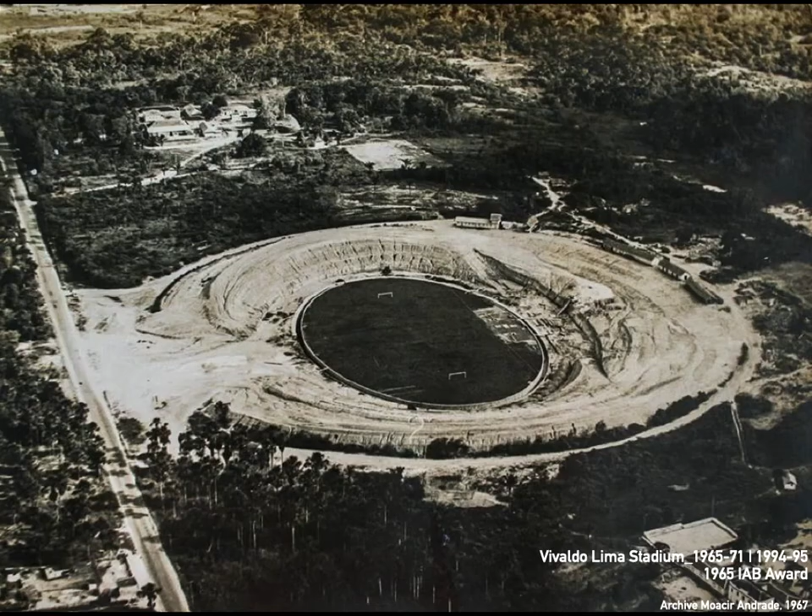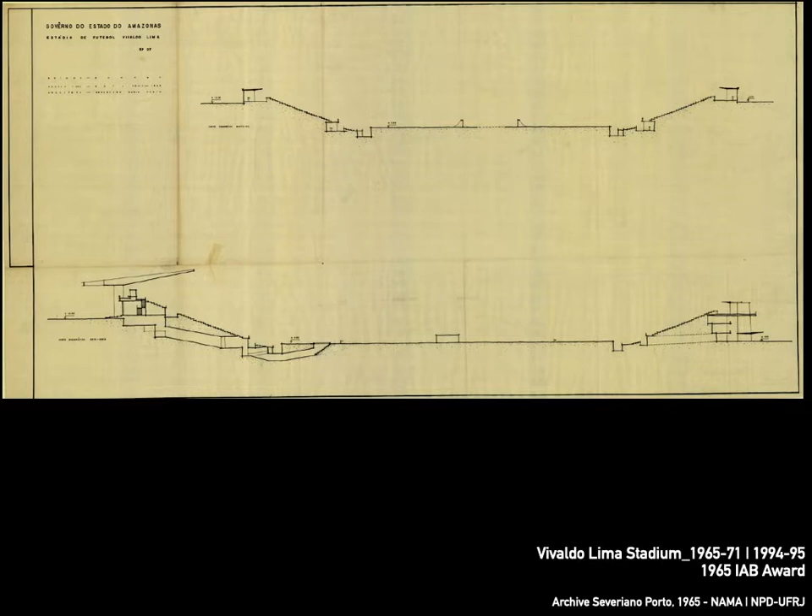The Vivaldo Lima Stadium was a milestone of developmentalism in Amazonia, as the main reinforced concrete construction to date in the region. It was embedded in the land and eliminated a large span of reinforced concrete bleachers with the simple support of these on the slopes.

Severiano Porto verifies the problems that occurred in the construction of Brazilian stadiums. By the end of the construction, the resources were scarce, which determined the cutoff of finishes, and facades were unfinished.

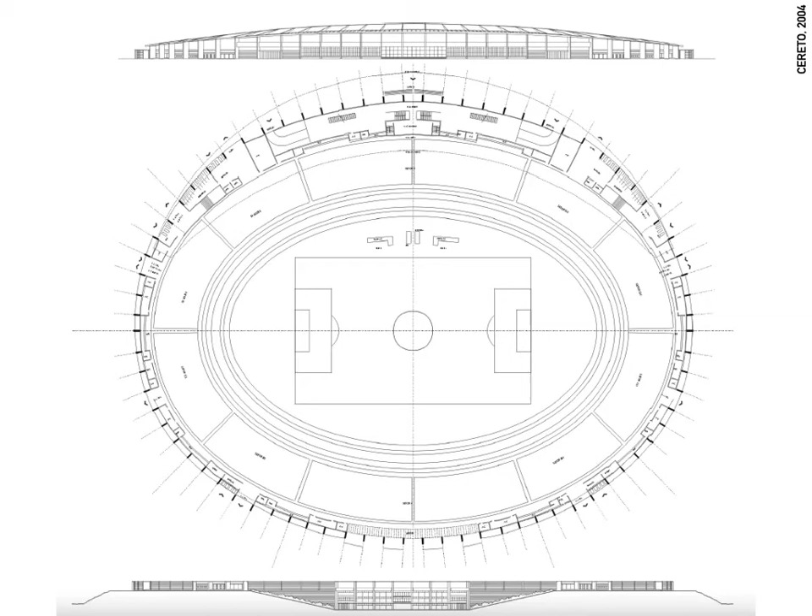The strategy of reducing the facades to suit the topography is rational and economic and supports the architect's design decisions. As a result, the building is low-rise and integrated into its immediate surroundings. The stadium had a capacity of 48,000 spectators.

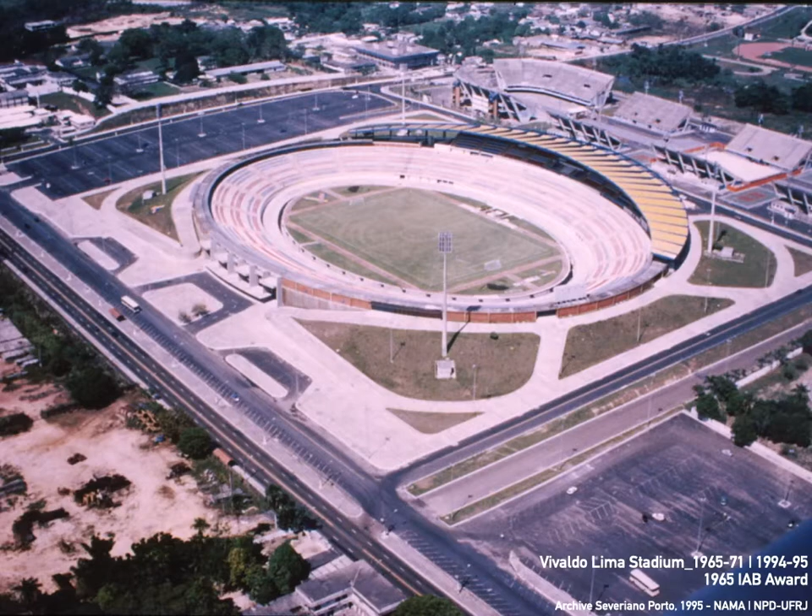Porto made Cafundó House for his family in Manaus on a rented site in the suburb. He distributed a wooden pavilion with a sawmill treatment on pilotis for social and intimate activities and the other areas in bricks for support activities. There was no glass in the frames, just movable cedar wood boards.

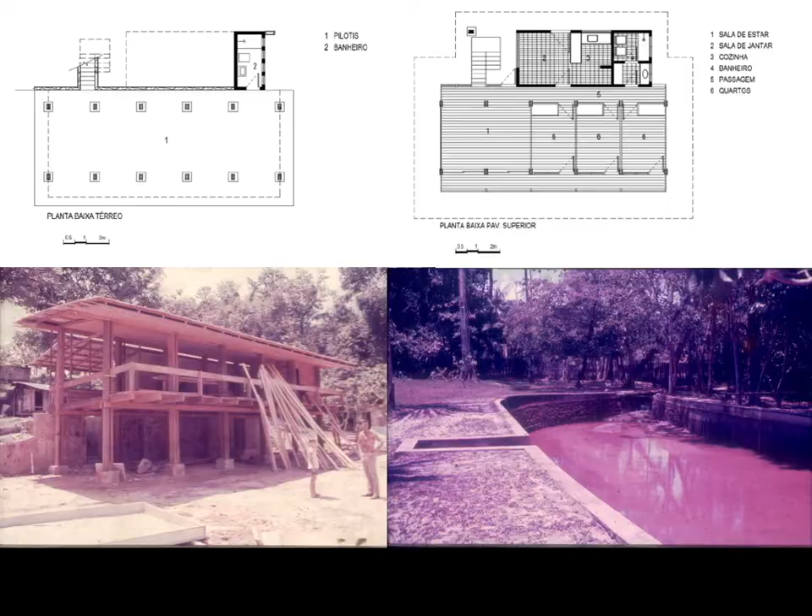Cafundó House was a manifesto against the government decision not to use this material for buildings in Manaus and reduced costs of construction 25% compared to brick buildings at the time.

Straw Hut Restaurant was a first building award, first prize in 1967. Porto's experience on the building site makes it possible to learn from the carpenters about new construction details, new ways of fitting wooden pieces, fixing straw on the structure, and treating wood as a material that should be incorporated into the site, as if it were still part of the rainforest.

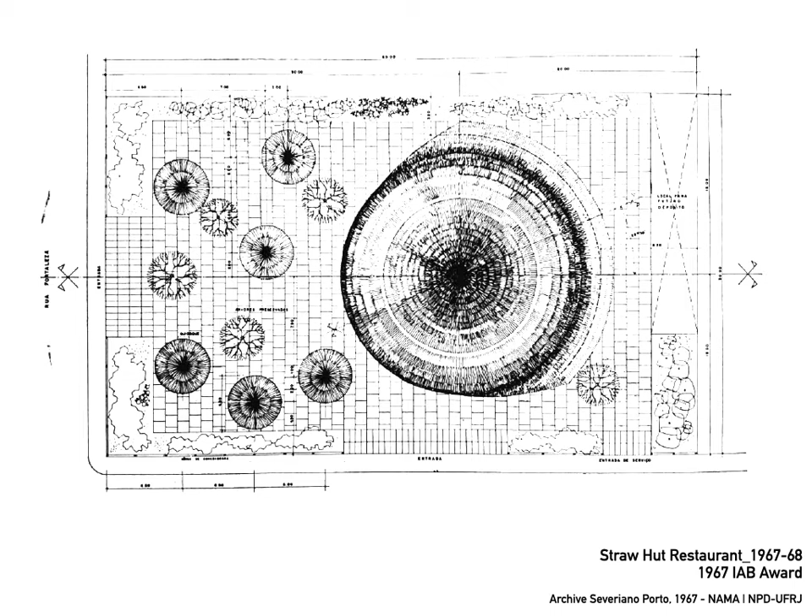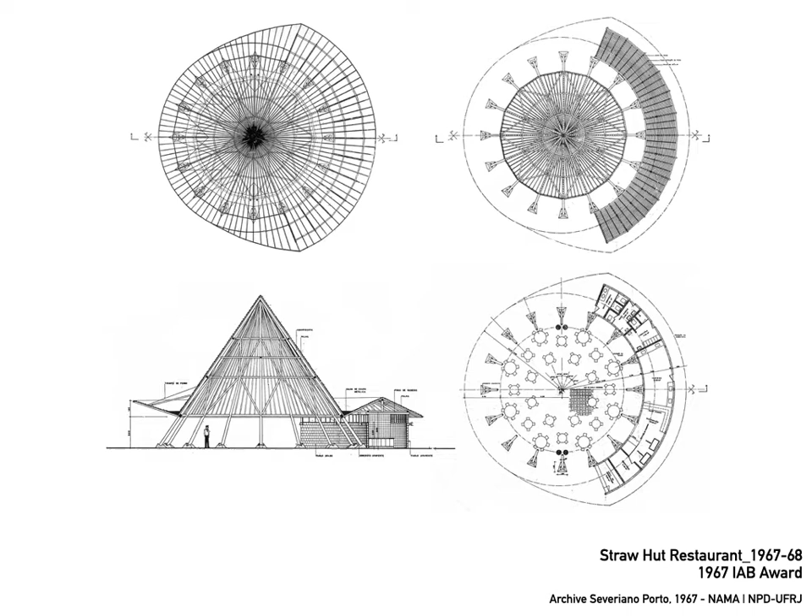The choice for a pure geometry and circular plan was made by the wide possibility to adapt it to the site. The carpenters present other simple and effective solutions for the construction that I've discussed with Porto. The wooden pillars formed a conical shape, covered with busu straw used by indigenous people in their malocas and chapanas. The space division was traditional with bricks. The low budget defined the choice of materials and construction techniques.

By that time, Acariquara wood was used as power energy poles in Manaus. The use of Acariquara wood without treatment and with simple fixation, as the carpenters were used to working in naval carpentry.

Porto's second house in Manaus was featured by simplicity in construction and wood treatment with complexity in architectural composition. The trees were cut for construction in a location close to the site without industrial treatment. In order to avoid shear between the pieces' joints, wider sections were used compared to commercial ones. Such dimensions matched the concrete structure.

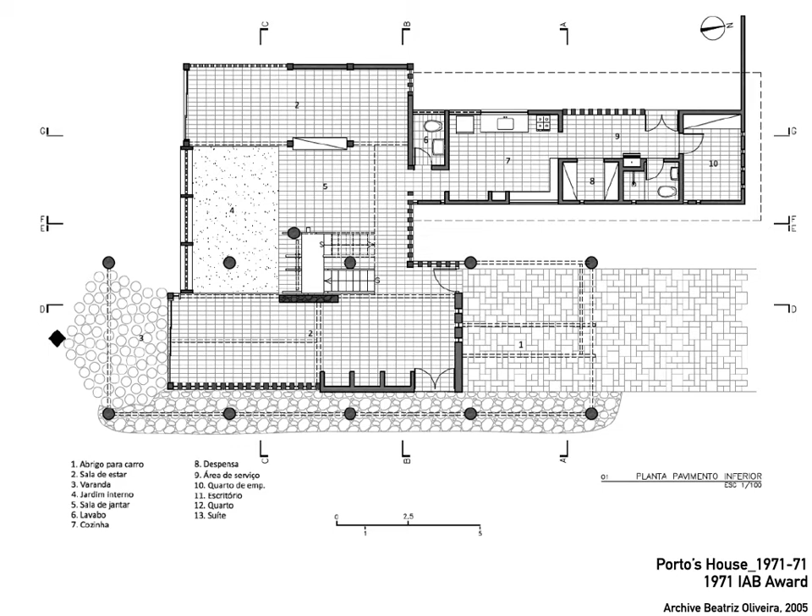The plan presents a simple geometry with a compositional complexity in the configuration of the building parts. The sectorization of the ground floor is conservative, with the separation of the service part in bricks and the social part in wood. On the second floor is the intimate part, with the studio and two small suites. All spaces are cross-ventilated and facing the Amazonian atrium, making a visual integration with the social area.

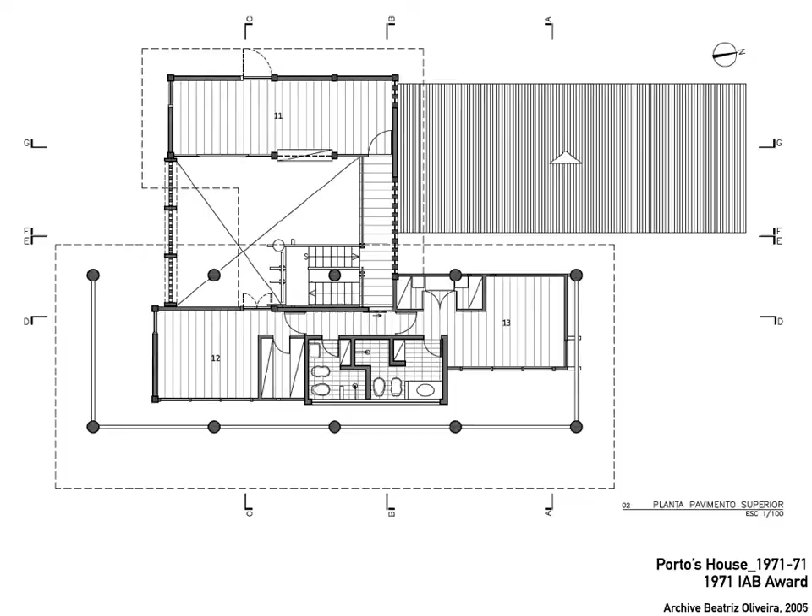The Amazonian atrium was the core of the house and presented contrast between open and closed, covered and open, light and dark, natural and artificial, handmade and industrial. The wall's porosity was diverse, which allowed constant cross-ventilation with different luminosities. Pillars made of Massaranduba wood with yellow glass gelosias and concrete cobogós framed the garden of the Amazonian atrium.

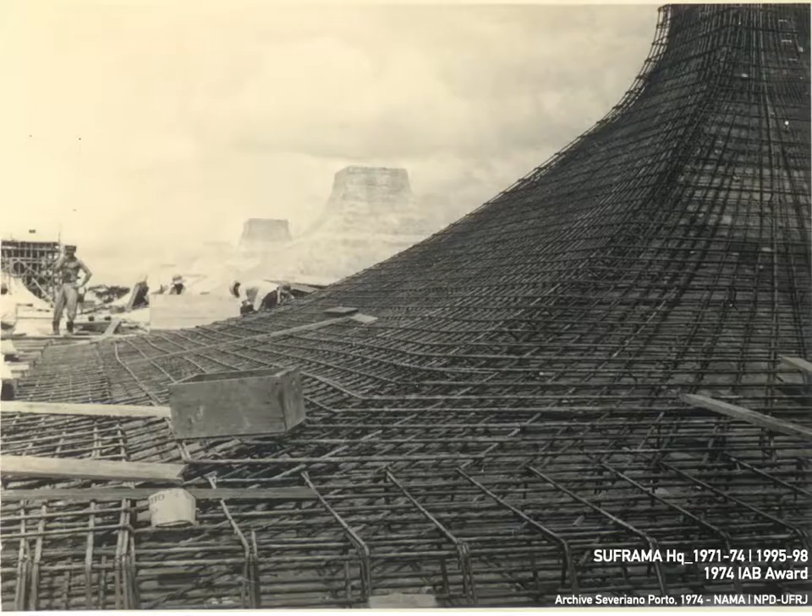SUFRAMA is an independent federal agency that represents Manaus Free Trade Zone. It is a symbolic milestone of the beginning of industrialization in Amazonia in 1967. The government hired Porto for a wooden building that would represent Amazonia. Porto stated that SUFRAMA would have difficulties to maintain a public building in this scale in wood, so he built it in reinforced concrete.

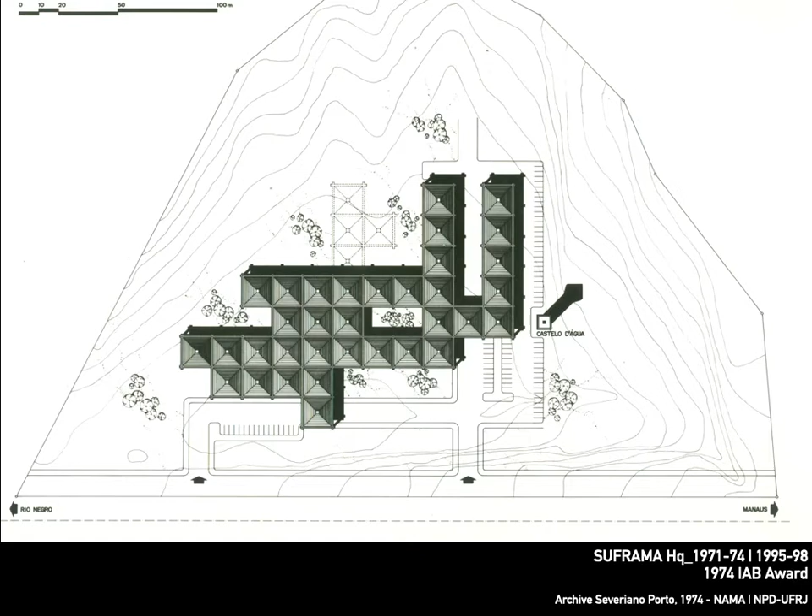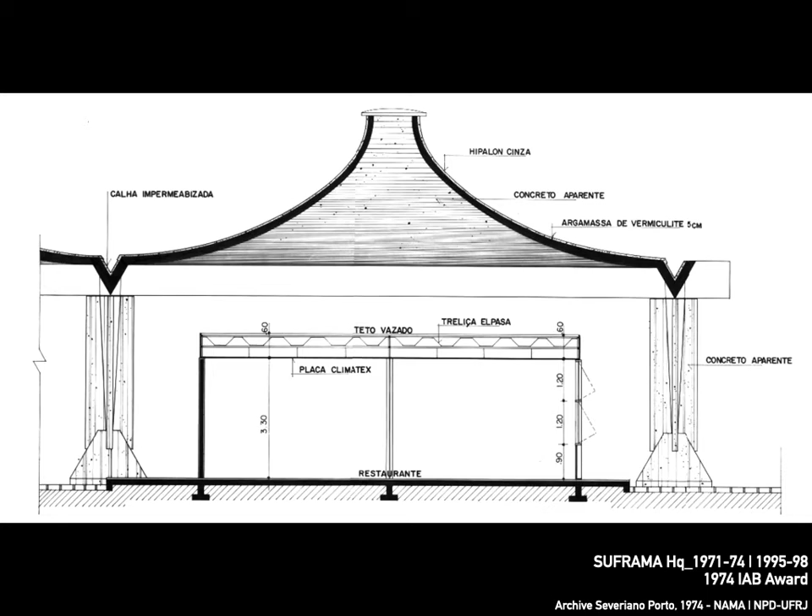The proposal is structuralist, similar to production industries. Porto proposed a homogeneity between the admin functions in his project without formal distinction in functional hierarchy. SUFRAMA's modules are 15 by 15 meters and are like tents with 4 pillars. The modules' cover has curved and arched slabs in reinforced concrete with a dome at the top. They are orthogonally juxtaposed, which allows a plan with depth without causing damage to lighting and ventilation.

Robert Schuster's Weekend House is located in Igarapé do Mariano in Manaus. He requested a house with a total environmental interaction.

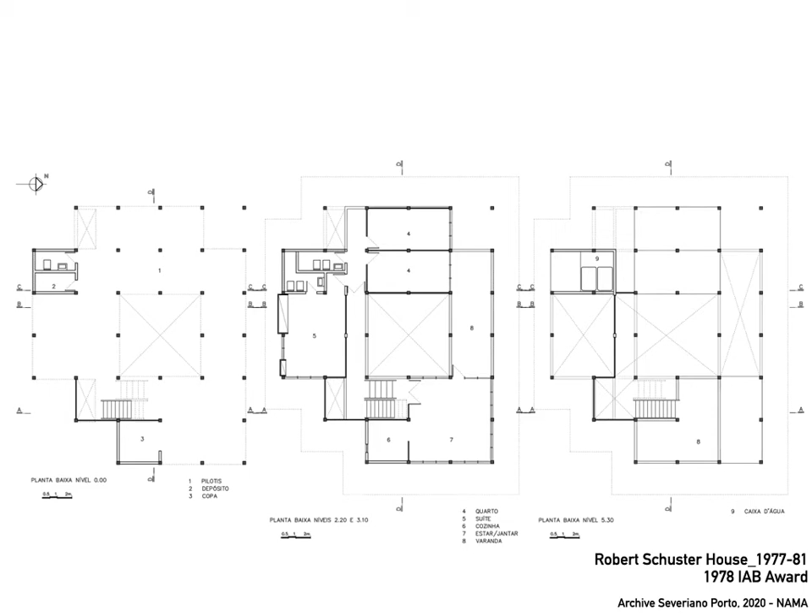Beneath the forest canopy, the pillars of this jungle house help it to merge with the tree trunks. Its regular geometry is determined by a rigid timber grid that is adapted to the topography and delicately touches the unpaved ground in the form of pilotis. The structural mesh is 2.5 meters by 2.5 meters.

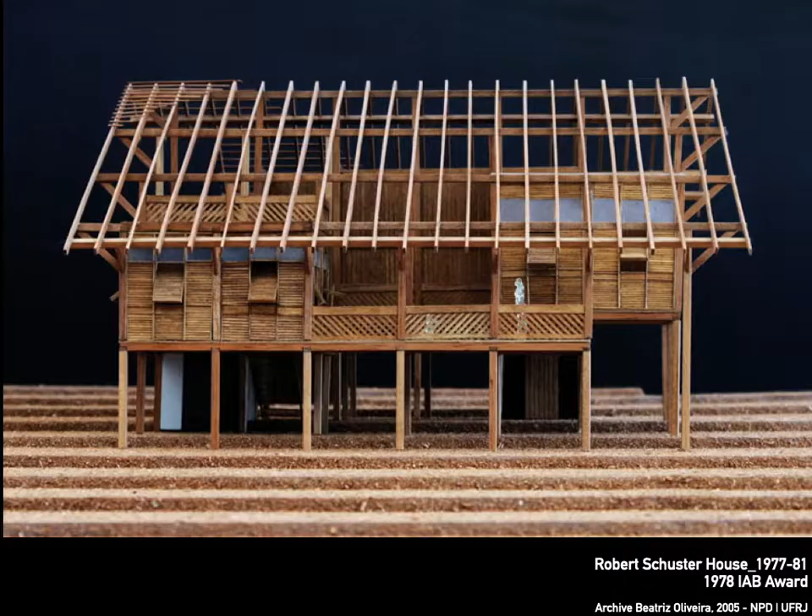Schuster's house is located on the highest part of the site. The land contains 30-meter high trees. The vegetation that protects the house from the sun is a threat due to possible falling branches. Porto safeguards the permeability of the soil, the leafy ground, and verticalizes the setting, in contrast with the traditional typology of riverside Amazonian houses. This condition requires a robust house structure.

The wood comes from a range of species and it is treated by the carpenters working on site. Nothing comes from the sawmill and edges are smoothed with a chainsaw. The roof of cavaco, wood chip tiles, protects the building from weather. This innovative solution was unusual in the context of Brazilian architecture in the 70s, but is common amongst the riverside dwellers of Amazonia.

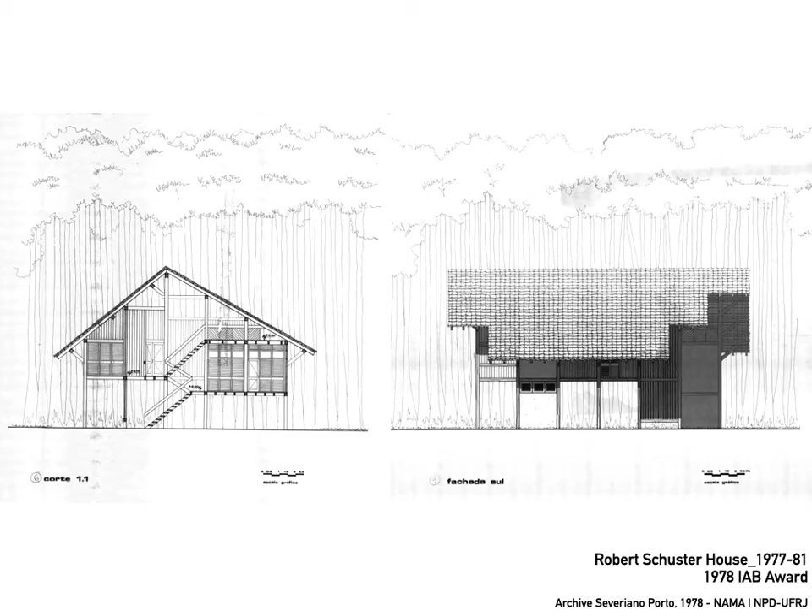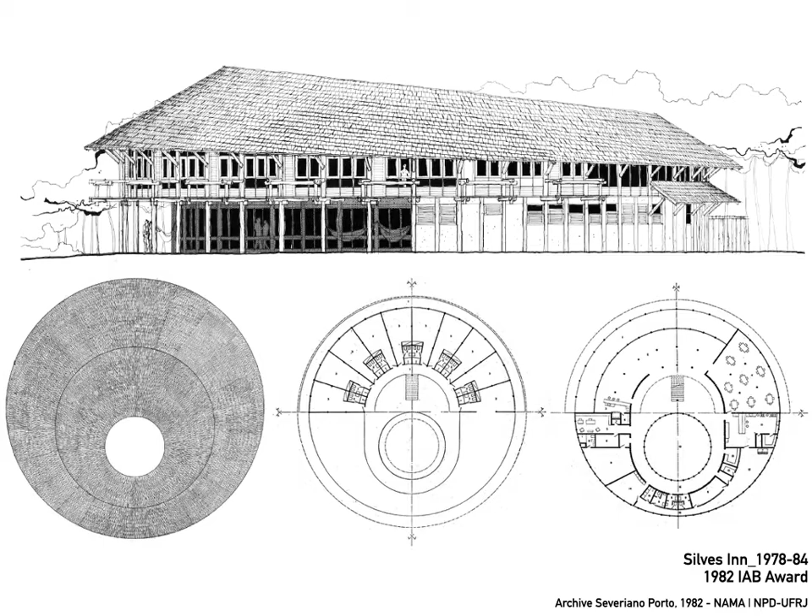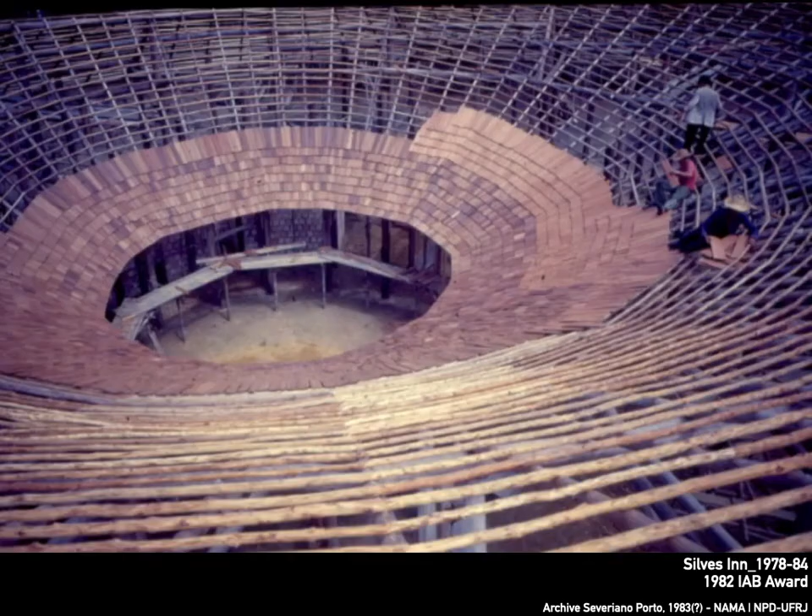The Silves Inn is located on an island in Lake Canaçari, 200 kilometers from Manaus. The hostel consists of a small group of buildings in the southwest of the island. To the east, at the entrance to the town, Porto designed a farm to supply both the hostel and the city. The covers, finishes, and support structure are in wood, while some of the walls and wet areas are in brick and painted in white. The cavaco is used again by Porto in a 1,000 square meter building.

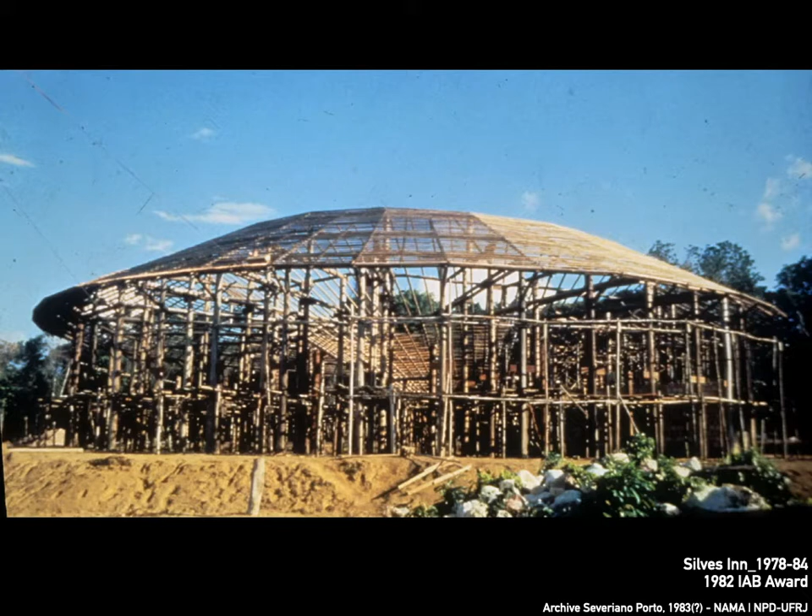Silves Inn is a milestone in the integration of the site proposed by Lúcio Costa in Brazilian modern architecture and used by Severiano Porto in Amazonia. The treatment of the pillars and beams was rudimentary, whilst the timber used in the furniture was more refined. The structural system is innovative for a timber building of this size. The pillars connect two beams that support a reinforced concrete slab in the bathrooms.

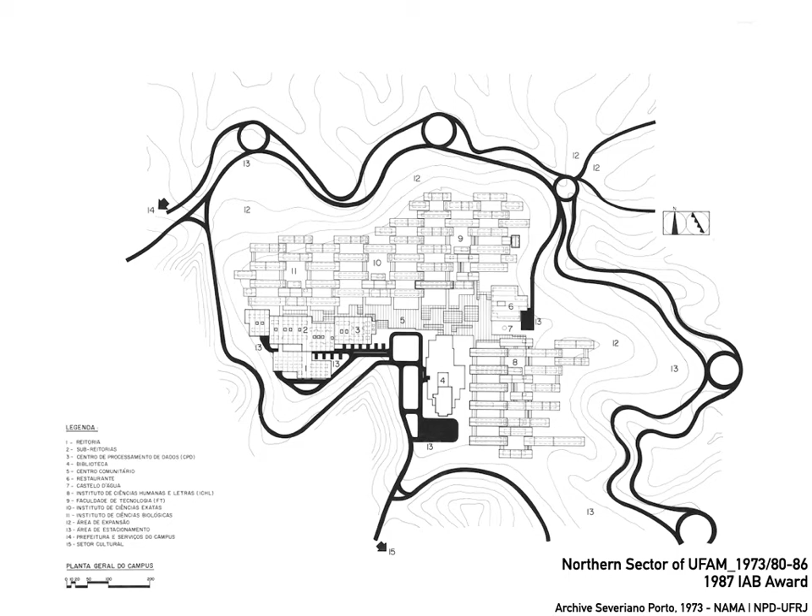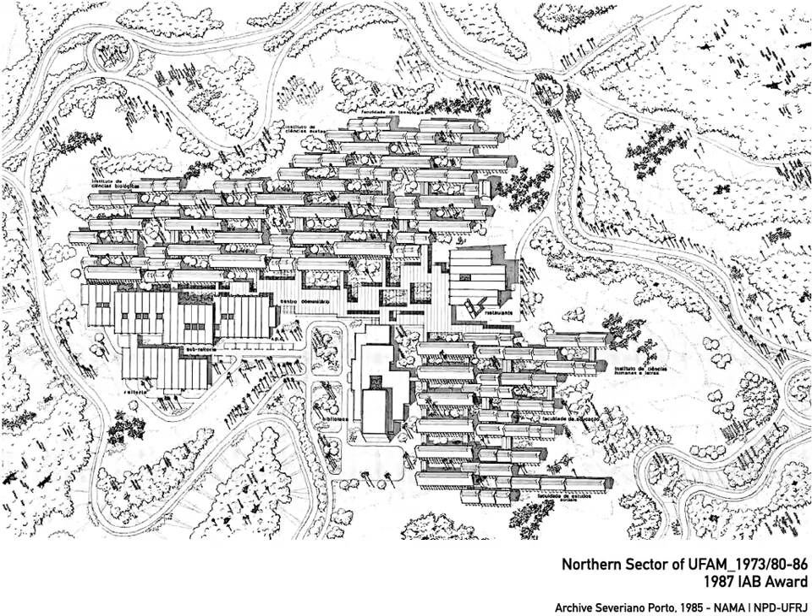The campus of Universidade Federal do Amazonas covers an area of 600 hectares of forest in the heart of the urban area of Manaus. Severiano Porto projected a northern sector in an area of 500 by 500 meters. Severiano Porto distributed the elements over a raised plateau, with a road and parking lots surrounding the area. Porto experimented with progressive concepts such as structuralist, metabolist, continuous growth, and utopian seed concepts in his design for a university that can be constantly expanded in line with changing needs. This principle has allowed the university to continue expanding to this day.

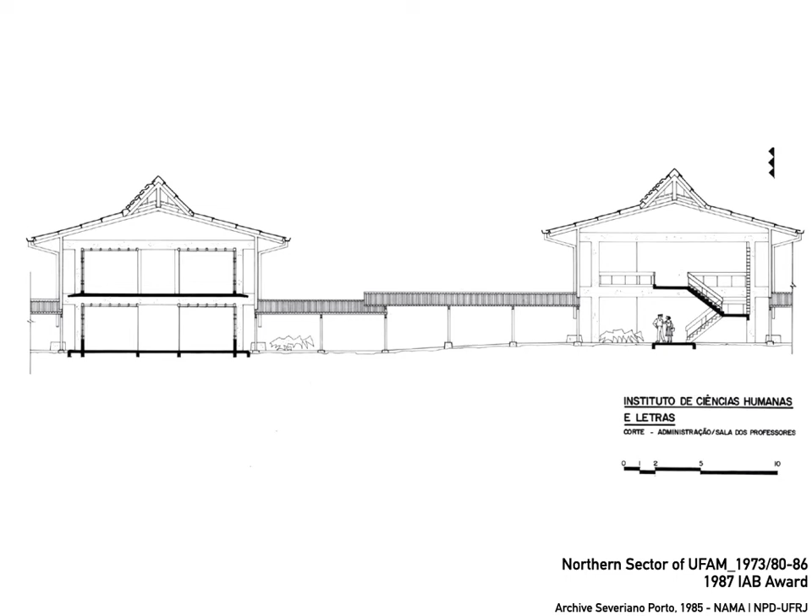The building is light and very inexpensive. It's structured by reinforced concrete with light and movable industrial panels. The roof uses laminated steel profiles and industrial tiles. Porto's strategies include a range of solutions: cross-ventilation, roof-level ventilation, flexible plans, wide overhangs that offer protection against the rain, water collection as a means of preventing soil erosion, and a modular construction that is adapted to the topography.

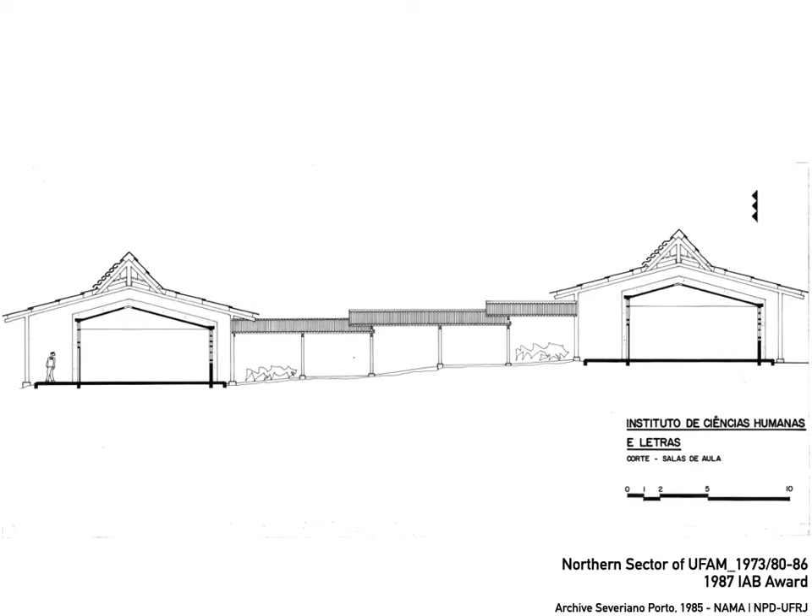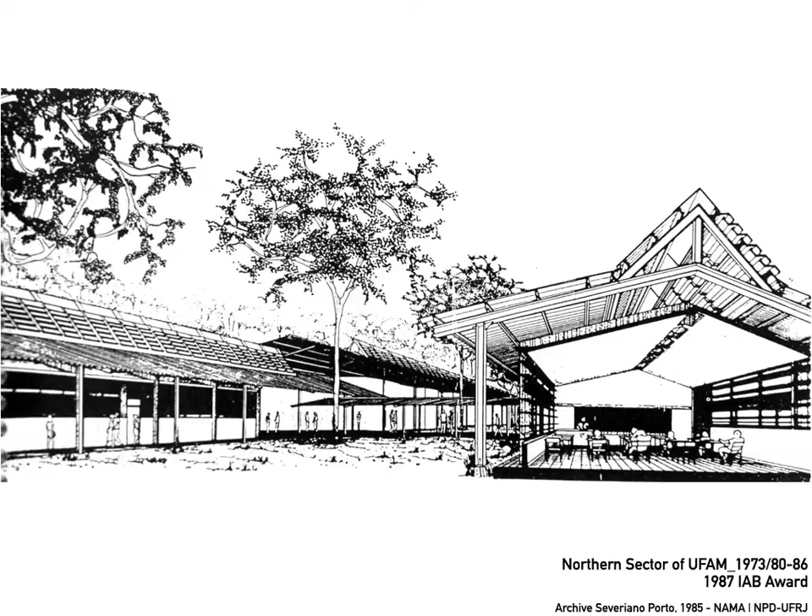In admin blocks, the program is verticalized on 2 floors and maintains cross ventilation between and over the envelopes. In the classroom blocks, the macro coverage solution provides an alternative for weather protection of the construction site and guarantees execution of the work budget in the financial year. Ventilation in classrooms also occurs through exhaust with openings in the upper slab, and it is enhanced by the roof vent in the macro coverage with metal plates to conduct the heat from inside the classroom to the attic.

The social areas are sheltered with a macro coverage. The campus of Universidade Federal do Amazonas continues to expand by following Severiano Porto's project 50 years ago, and it has one of the lowest maintenance costs in Brazilian universities.

The Company Town of Balbina was built to house workers for the construction and operation of a hydroelectric plant in Amazonas state. Balbina's hydroelectric plant changed the geography of Amazonia in the 80s and flooded an area of 3,119 square kilometers. And it is considered one of the worst environmental disasters in Brazil. In addition to the environmental disaster, it flooded the lands of the Waimiri Atroari and caused its population to be almost wiped away.

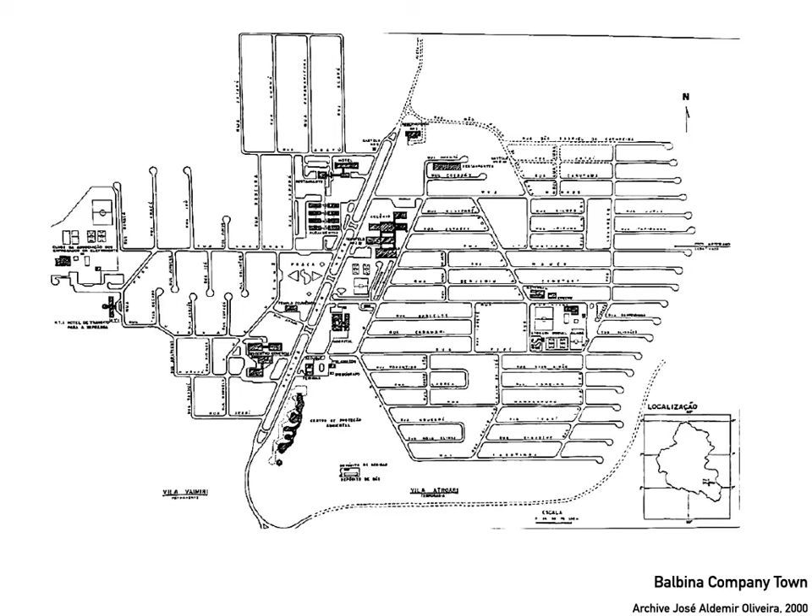The Company Town of Balbina was built by the construction company Andrade Gutierrez and divided into 2 sectors: the brick houses for the operation employees to the left of the main road, and the wooden houses for the workers involved in the construction of the power plant. The Balbina Environmental Protection Center is in a strategic position at the entrance to the village, on the side of the wooden buildings.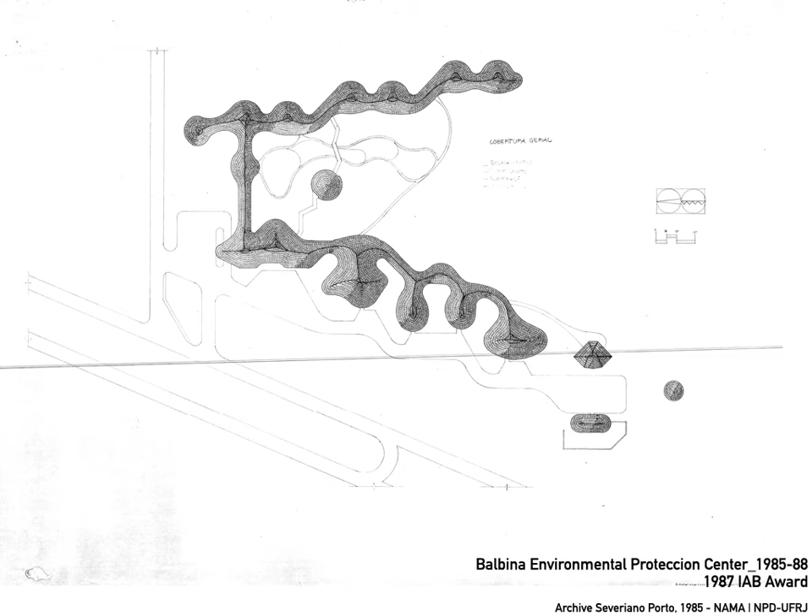To study this environmental disaster, the government was forced by the courts to build a research center and use thousands of trees that were rotting in the flooded lake. Severiano Porto was hired for his experience in large-scale works with wood in Amazonia. The site has a slight slope, and the project is structured in 2 converging wings. Along the streets are labs, while more secluded is the accommodation for researchers. The Balbina Environmental Protection Center is monumental and iconic.

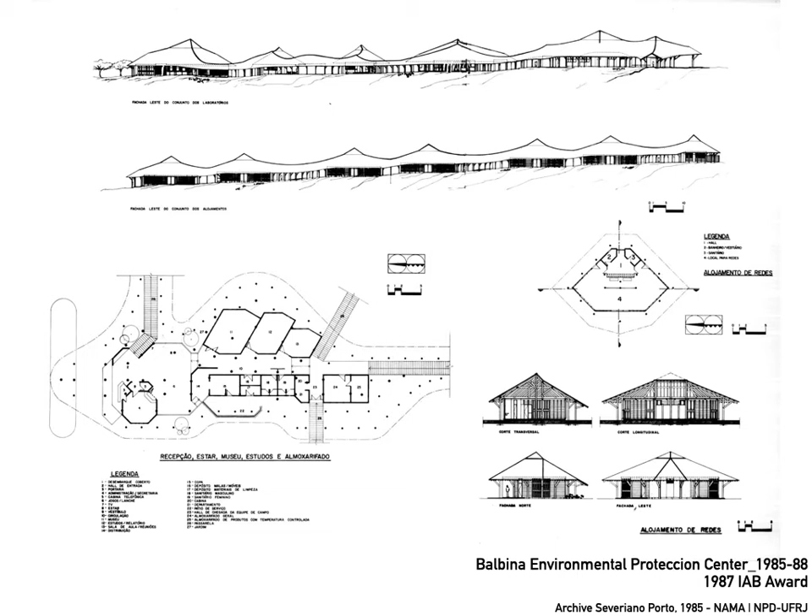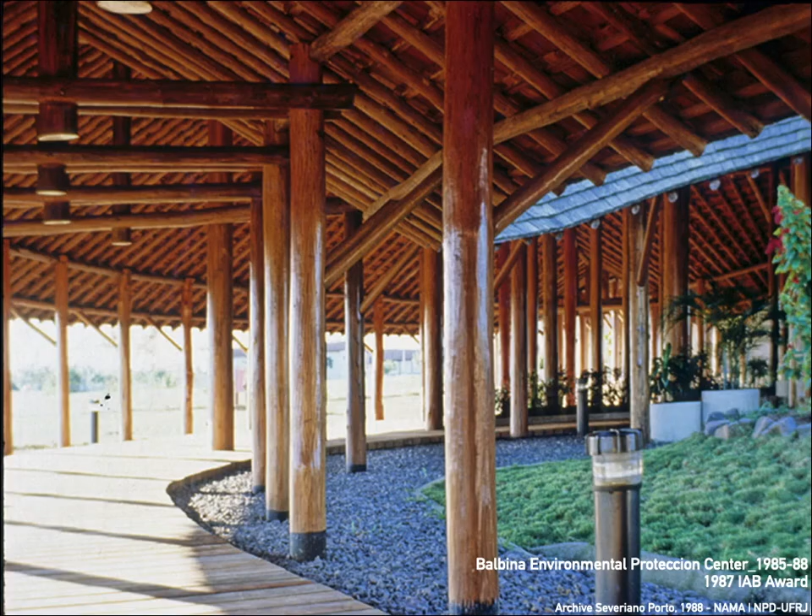The previous experience with cavaco tiles, started at Schuster's house and at Silves Inn, is elevated to another degree of complexity in a 6,000 square meter building. The freedom is not restricted to form, but extends to the different heights of the roof ridge that generate variable spaces that go up or down according to the program.

This blend between the industrial and the artisanal took shape with the help of cranes combined with craft to build the architect's masterpiece. The forest of pillars marks the monumental structure, in which research labs are grouped below a large roof and distributed along snaking walkways. The cavaco roof covering follows the winding plan, its varying height determined by a ridge that rises and falls along the length of the building.

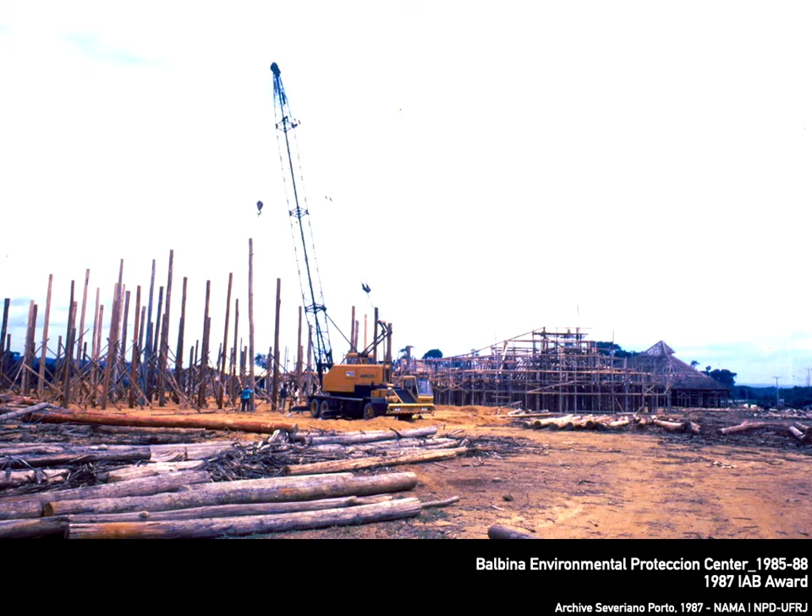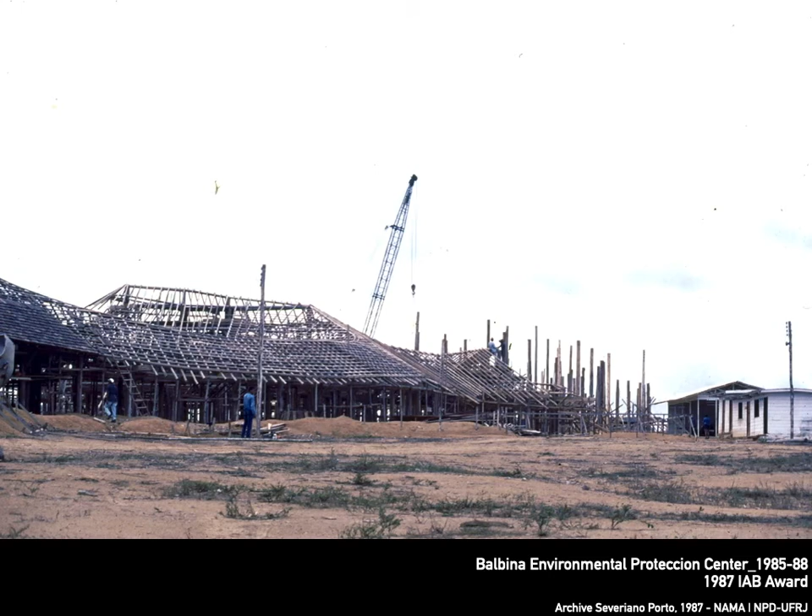For the first time, Porto's wooden building would be built by another construction company, used to major infrastructure works in reinforced concrete. Porto invites his naval carpenter, Elias Imbiriba, and along with the construction company, they set up a workshop to train local labor in wood treatment and construction. The construction site with cranes and naval carpenters in harmony shows a construction utopia of a fantastic architecture. The union of craftwork and industrial knowledge takes place in Balbina. Balbina is the masterpiece of Brazilian modern architecture in Amazonia.

This brief presentation of Severiano Porto's trajectory in Amazonia is a rescue of one of the main environmental references in the Americas and qualifies him for the 2021 Global Award for Sustainable Architecture. Porto's architecture expresses a palette of gradations from rusticity to refinement in the same work. It teaches us that labeling an architectural production with a materiality, a development model, or a means of production is an unnecessary simplification given the complexity observed in the architect's works. The architecture produced in his offices is not raw or cooked, handcrafted or industrial, environmental or developmental. It's just what it should be.

The recognition of the Cité de l'Architecture et du Patrimoine provides excellent prospects for maturation and inclusion for architecture in the 21st century. Porto's wooden works are being lost in Amazonia due to a lack of maintenance that is a consequence of both environmental legislation and the loss of essential skilled labor to other more profitable activities. NAMA has a great opportunity, with custody of Porto's archives, to continue his legacy in Amazonia with the formation of new architects and maintaining or reconstructing his wood buildings. That way, we will be able to document and train future construction workers and keep the constructive tradition alive.